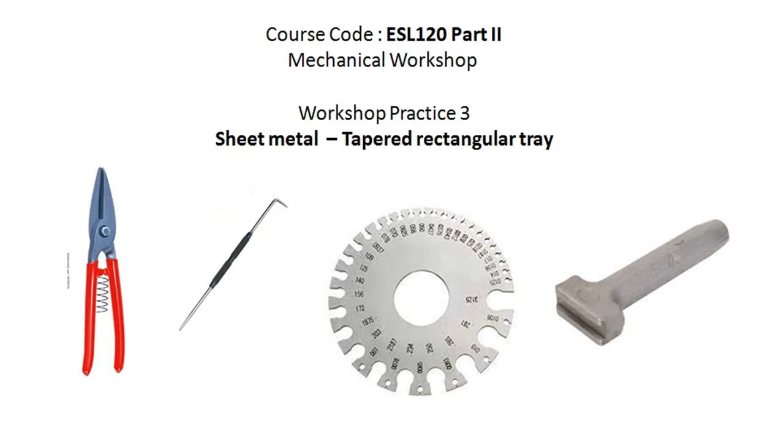Today we will make some item in sheet metal shop. See what is sheet metal shop? Where the items are made from sheet. Now you should know what is meant by sheet. Sheet is any item in the form of laminar form having thickness not more than 4 mm.

Sheet can be made from MS, copper, brass, aluminum. Almost all metal can be converted into sheet. But a few metals cannot be converted into sheet. For example, bell metal, we cannot make into a sheet because it will be brittle.

Usually in our shop we will be using a 24 SWG sheet metal. 24 SWG is almost 0.5 mm thick. We are using a galvanized iron sheet. Galvanizing is given to iron sheet to reduce the corrosion effect. Usually galvanizing is done by dipping the item in molten zinc.

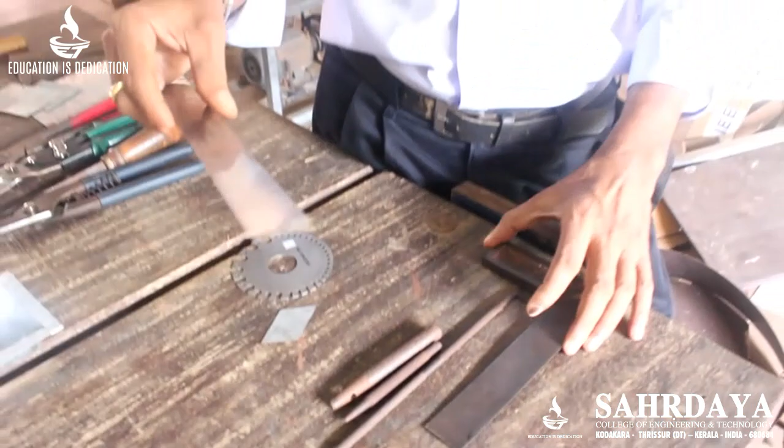Today we will discuss about the tools used in a sheet metal shop. The first item, as you have already studied in another class, is a steel rule for measuring the size of an item to be made or converted, whatever may be. This, as already told, is marked in millimeters as well as inches.

After getting the item, sometimes we may have to reduce the size of the sheet metal or cut the item. Before cutting we have to mark the item with a tool called a scriber. This is a scriber, a pointed tool, so that we will get the marking properly on the sheet metal.

The method is: you keep the sheet metal in a plane surface, then place a straight edge, then mark the line. See, you can see a marked line here. Can you see the line I just drew here? I think it is visible.

In order to select the sheet, usually an equipment is used. The name of the equipment is standard wire gauge. You can see a disc type item having many slots in the outer periphery. It is written as 1, very large gap is there, 2, 3, like that it is going, and the size of the gap keeps reducing. You can see what is written here, standard SWG. SWG means standard wire gauge.

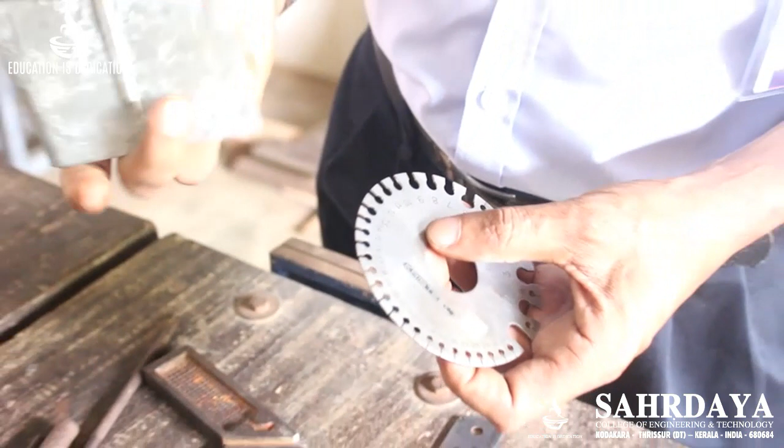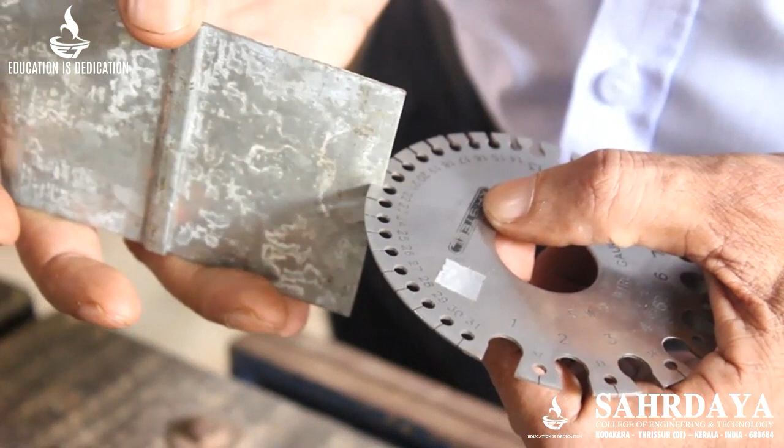How to measure, I will show you. You just insert the item to be measured in the slot. You can see it is 22, it is going freely. But in 23 it is a little tight, but it is going. So this is a 23 gauge galvanized iron sheet. Galvanizing is done to reduce the corrosion effect. Usually corrosion will be less for galvanized iron sheet.

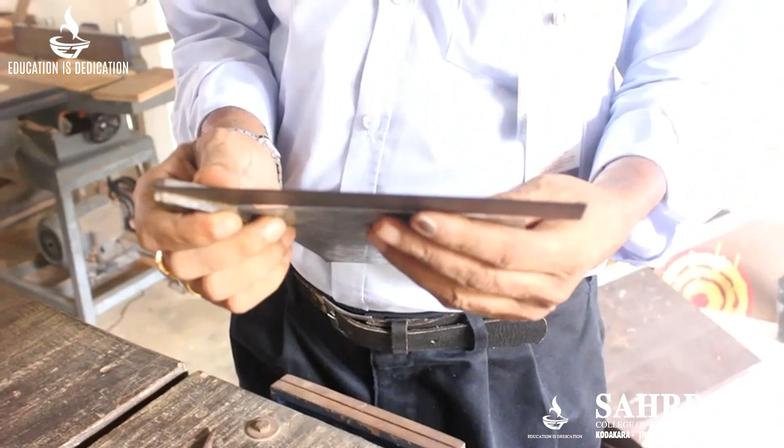You can also use a tri-square for measuring the 90 degree of any item. Suppose I want to check the 90 degree of this sheet, this corner, then I have to keep the item like this. You can see a large gap here, that means it is not 90 degree. If it is not 90 degree, and there is a very large difference, then you have to cut the item. If only a small difference is there, you draw a line with a tri-square like this.

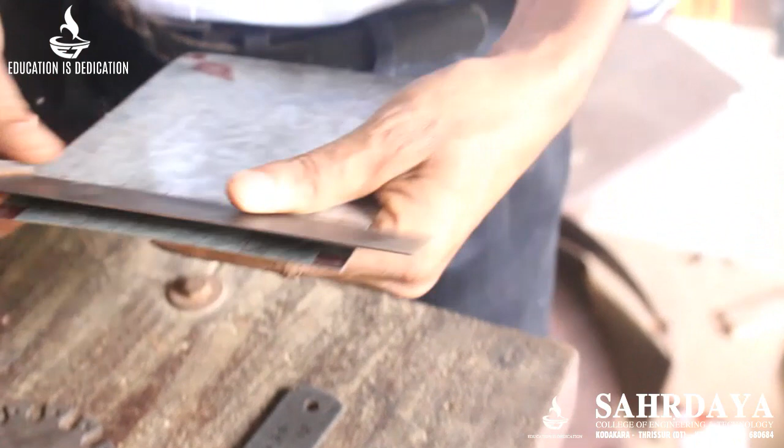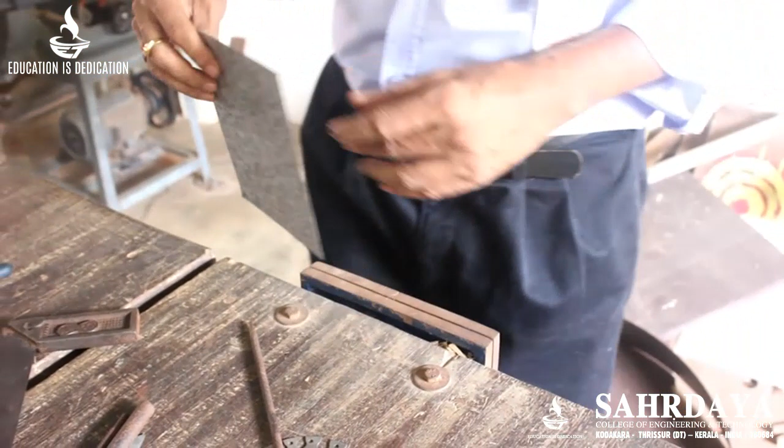Then remove it. It is difficult to cut a very small item of the order of about half mm. What you have to do is hold the item in a bench vise, then file it and reduce the size, so that this angle becomes exactly 90 degree. That is the usual procedure. For that, we usually use a tri-square as well as a small file, usually triangular or small flat file.

Sometimes we may have to join two sheets together. Suppose I want a large item, but only a small item is available. One more item can be joined here, so that you will get a large piece. In order to make that, usually there are 3 or 4 methods. One of the methods I will show you quickly, then I will continue with the next type of joint.

Suppose you want to join two pieces like this one. One method is by putting a hole. In order to make a hole, usually a tool called a punch is used. This is called a solid punch. You can see a circular item and a cylindrical item with sharp edges.

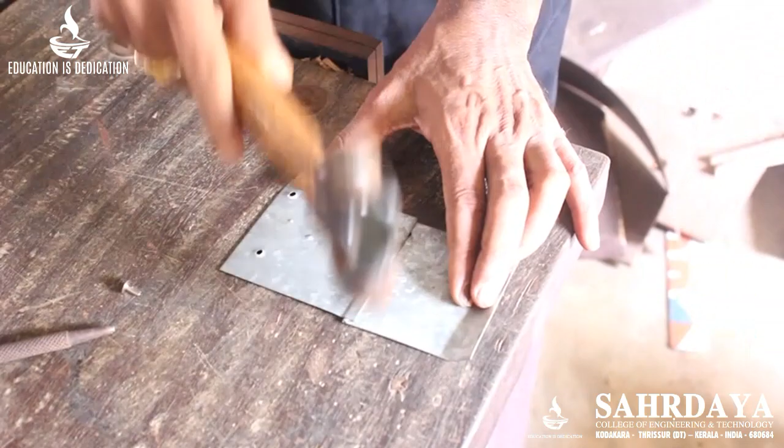Now it has become a single piece. A joint is made, but a small problem is there. If you push together with great force, it will come off. So in order to avoid that slippage, usually another tool is used.

The name of the tool is groover. You can see here there is a groove, and the width of the groove will be keeping on the joint, and we have to strike from the top. Now both sheets will be in the same line, so that even if we are pushing, it will not come off. This type of joint is called a seam joint.

Usually this type of joint is used for air ducts, etc., to carry the cold air. Usually in cinema theatres, etc., you can see this type of joint in the air duct.

See, I am drawing a line here. This is a galvanized sheet metal. Can you see the line properly? I think it may not be properly visible. In order to increase the visibility of the line, usually one punch mark will be done. For that, a punch like this one is used.

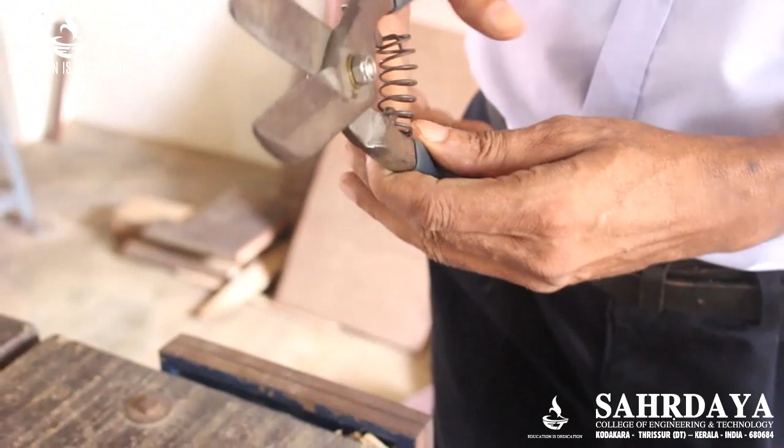In order to cut thin sheet metal, you can use an equipment called snips. Snips is something like scissors. It has two blades, a fulcrum, and a handle. Sometimes a spring is also provided for returning the blades to the original position. I will show you how to cut the item.

On the line, you keep the blade like this, then press with your hand. So you can see cutting is done. Like this you can cut. Usually you have to draw the line where you have to cut the item.

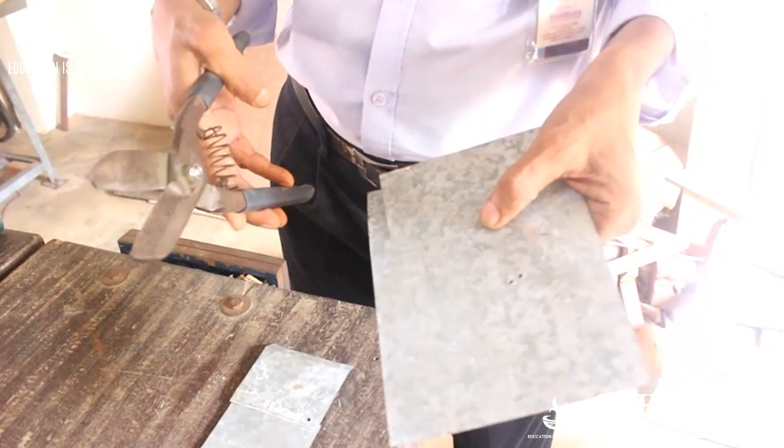This snips is meant for a right-handed person. I will tell you the difference between a right-handed person's snips and a left-handed person's snips. For a right-handed person's snips, the item coming from the bottom comes at the top on the right side. You can see this is at the right side. The blade of this handle is coming at the right side when I am looking from this side. This is meant for a right-handed person.

Usually color coding is also done for the snips. You can see this is a navy blue item, and sometimes it may be colored yellow or red. All these are meant for right-handed persons.

Usually for a left-handed person, the orientation of the blade will be different. You can see this one, the handle item coming from the bottom is at the left side, blade is at the left side. This is meant for left-handed persons. This type of double lever type snips is also available for right-handed persons, but the orientation of the blade will be different. Okay, this is the difference between left-hand snips and right-hand snips.

Sometimes we may have to cut some curvature. For that, usually a curved snips is used. You can see this one, curved snips, so that you can cut along. First, draw the curvature with some pen or CD marking pen or something like that. Then cut along that line, so that you will get a curvature.

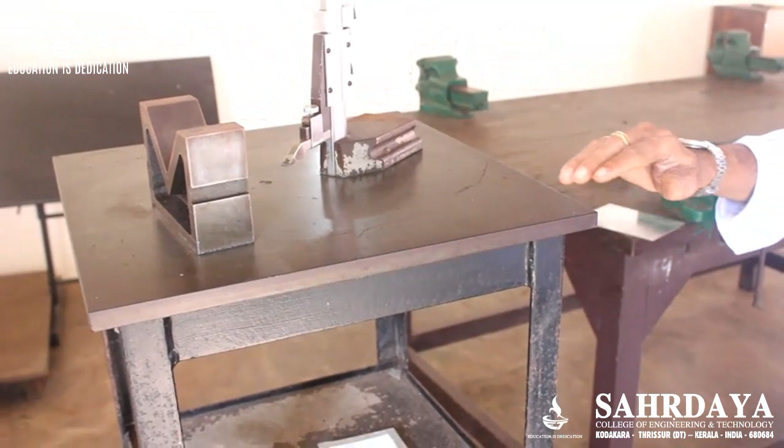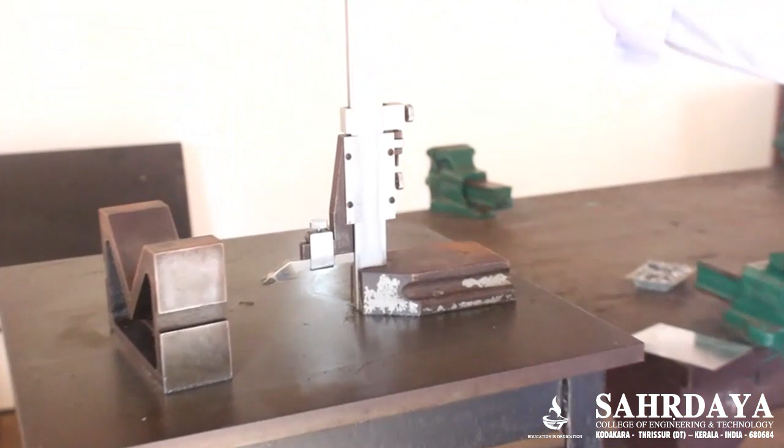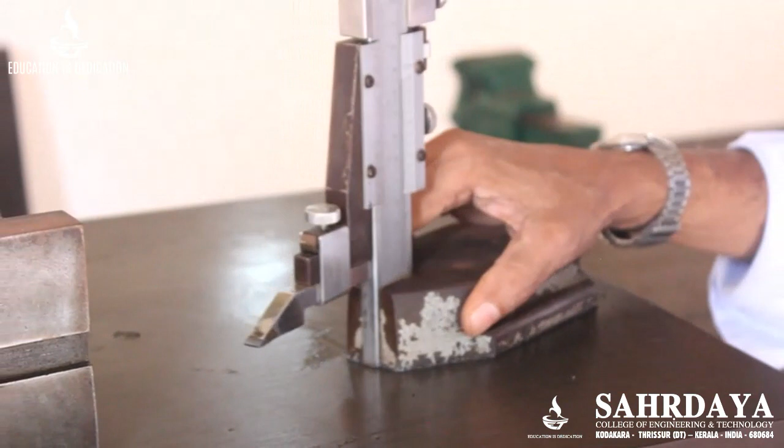This is the surface plate. A surface plate is a plate with a perfectly machined top surface. Over the top surface, usually an item called a vernier height gauge is kept. You can see here, this is the main scale, this is the vernier portion, and this is the scribing jaw, called the scribing jaw, so that we can mark a line over the workpiece.

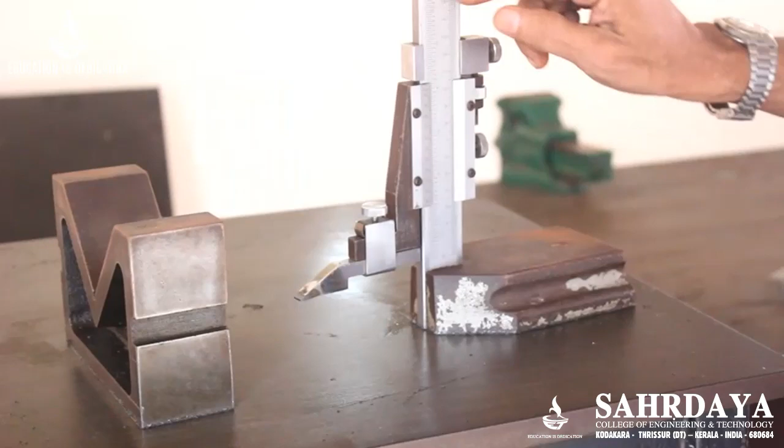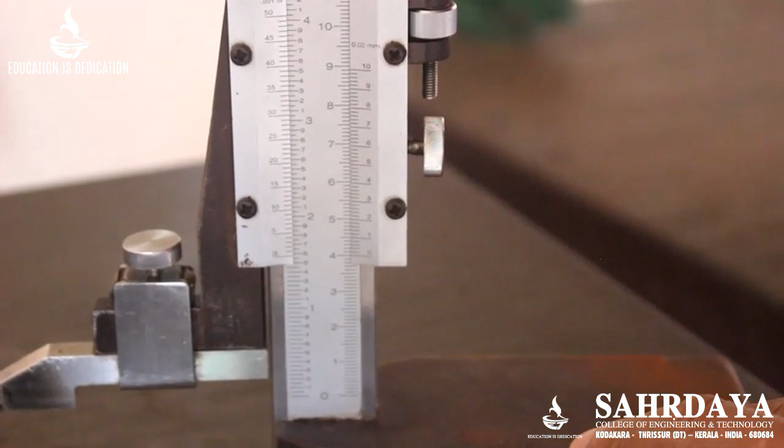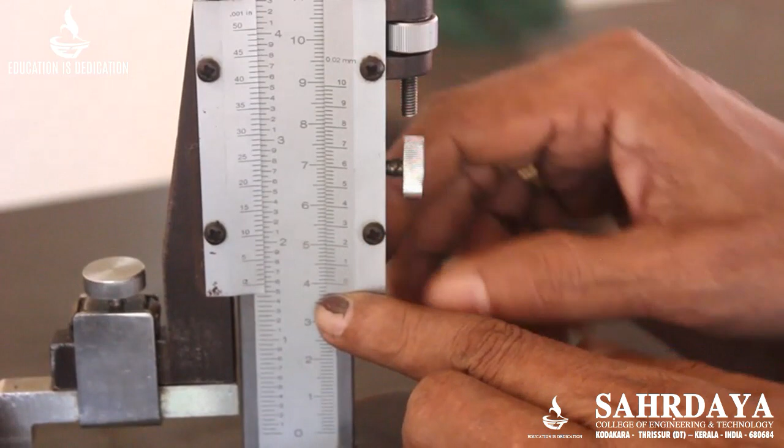Here the main scale is graduated in mm, and the vernier scale is also graduated. I will tell you about the graduations in the vernier as well as the main scale. Here the main scale is marked in millimeters and centimeters are written, 0 starting from here. Similarly, on the vernier portion, graduation is also marked. In the vernier scale, 49 mm is equally divided into 50 parts.

Now, how to find the least count: it is 1 main scale division minus 1 vernier scale division. 1 main scale division is 1 mm, minus 1 vernier scale division, which is 49 by 50 mm. So least count equals 1 minus 49 by 50. That can be taken as 50 by 50 minus 49 by 50, which is equal to 1 by 50. So 1 by 50 is the least count.

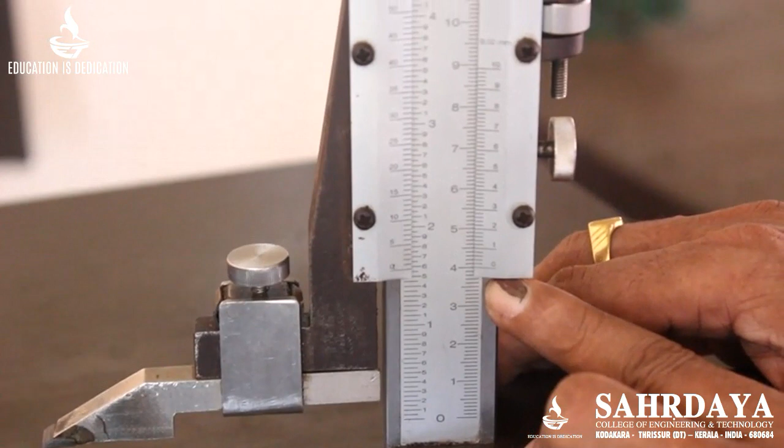1 by 50 can be converted into decimal. You multiply numerator and denominator by 2, then you get 2 by 100. 2 by 100 is equal to 0.02. That is the least count of this equipment.

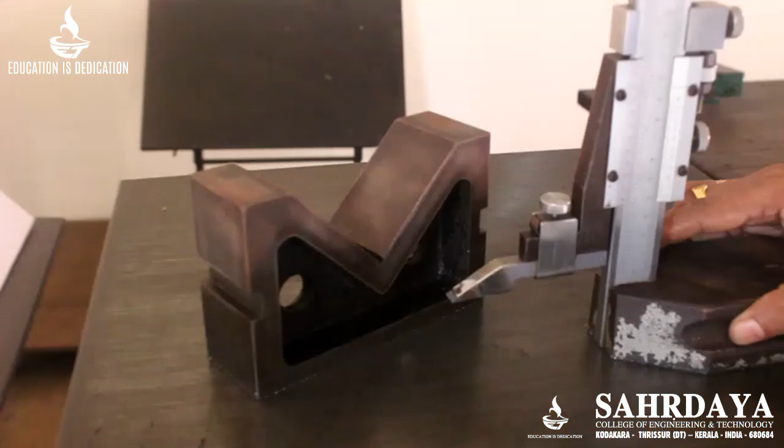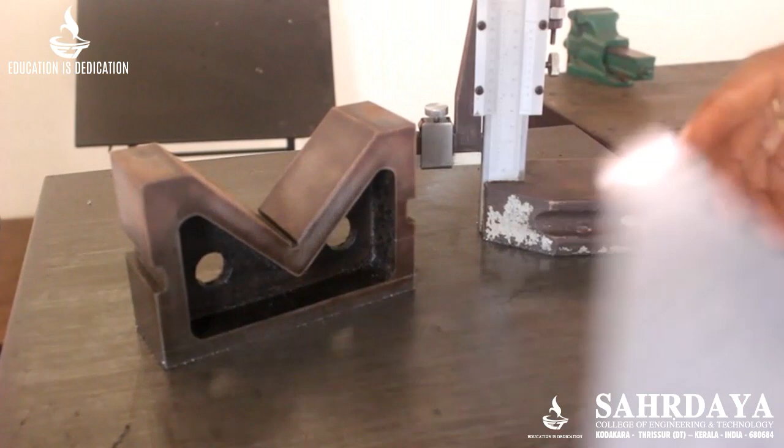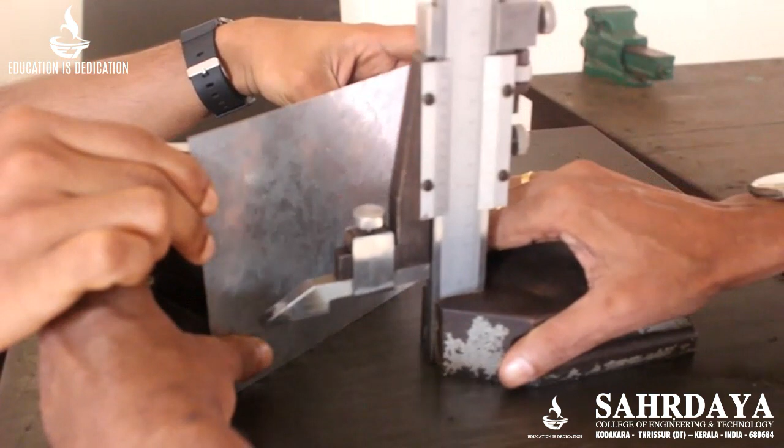Now I will show you how to mark an item, the procedure for changing the dimension, etc. In order to support the workpiece, usually an item called a V block is used. You can see there is something like a V, and usually the workpiece will be leaned against the V block, kept, and then you can adjust the reading of the scriber.

Suppose I want to draw a line at, say, 50 mm. Then what you have to do: the 0 of the vernier portion is kept very near to 50. It may be difficult to position it exactly at 50. Then what you have to do is tighten the thumb screw of the auxiliary head. This portion is called the auxiliary head and this portion is called the main head. Then you tighten the auxiliary head, then adjust the main head with the thumb screw provided here. You can see this is moving, the vernier portion is moving, isn't it?

Suppose I want to correct at 49. Now it is 49 instead of 50. If you want to make 50, you just rotate it and it will come to 50. Now it is 50. Like that, minor adjustment can be done with the thumb screw.

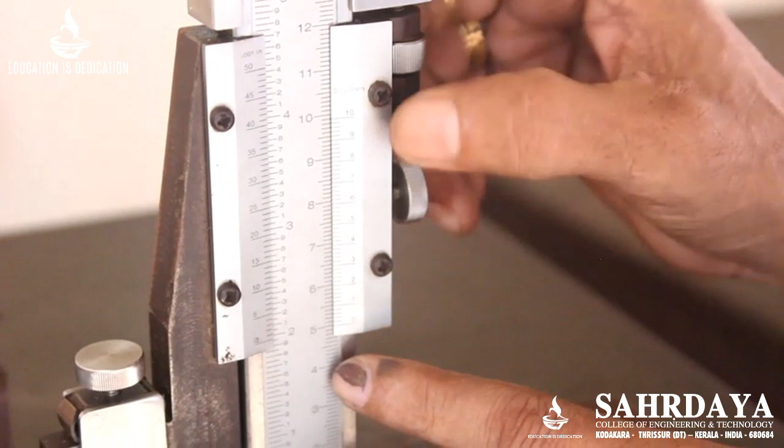After that you should tighten the item so that this will not move. Then you can keep the item here and draw the line. Now it is at 50 mm. The line is at 50 mm.

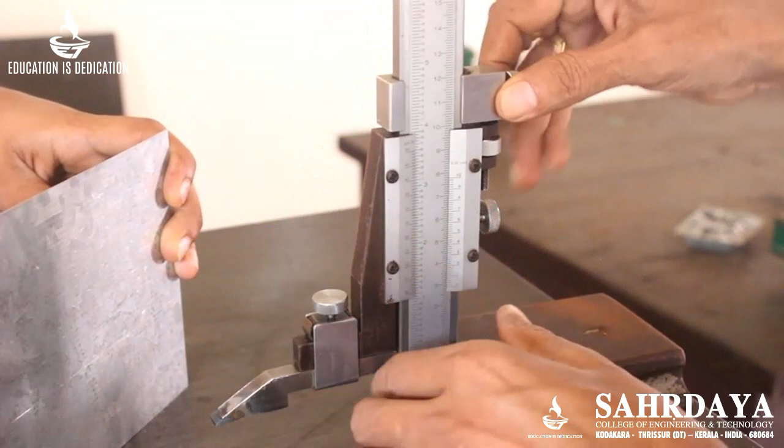Suppose I want to draw another line at 20 mm. What do you have to do? Hold the main head here with your left hand and loosen the thumb screw of the main head, also the auxiliary head. Then move the item and keep the zero of the vernier portion very near to the required dimension. Then tighten the item. Then you can again adjust the item with the thumb screw, then tighten this one. This is the procedure for adjusting the scriber height, so again you can draw the line.

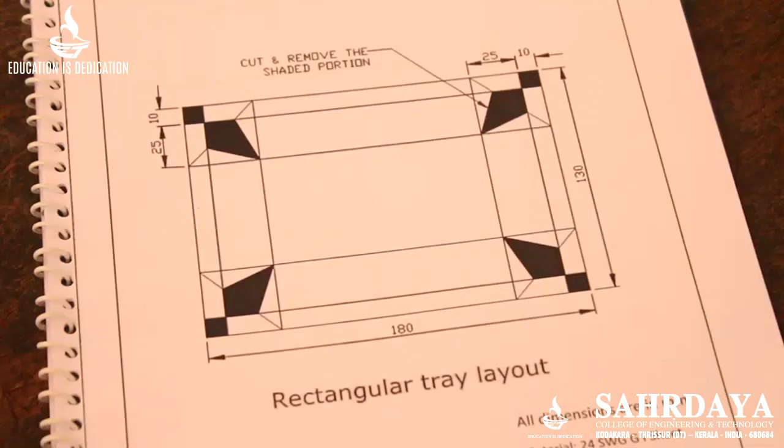This is the usual procedure for drawing the line. Today our aim is to make a prismatic shape like this one. This is called a tapered rectangular tray. In order to make this one, first we have to draw the lines where we have to remove certain portions so that we can fold it into this shape.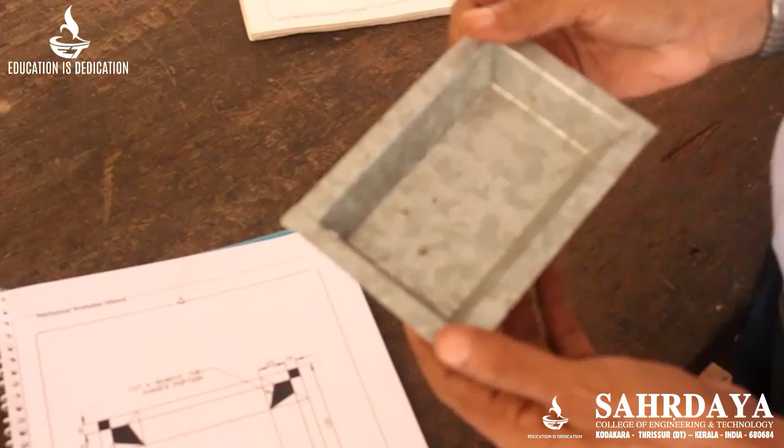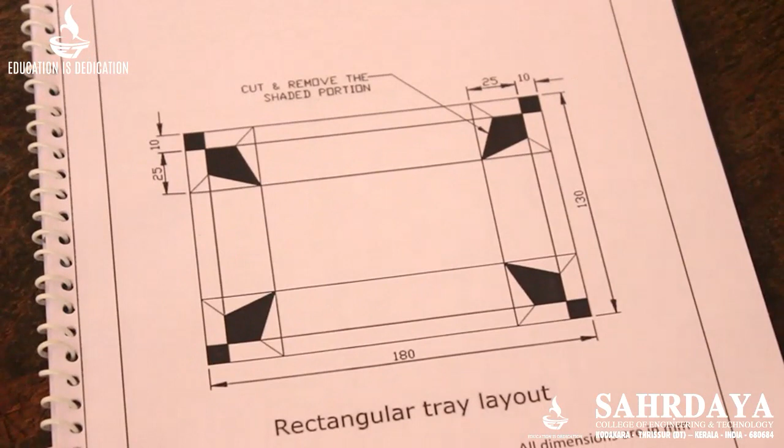You can see this figure. This is the layout of the tapered rectangular tray. Layout means if you unfold this one and look at the item, you will have an item like this one. The size of the sheet metal we have to use is 180 into 130 mm.

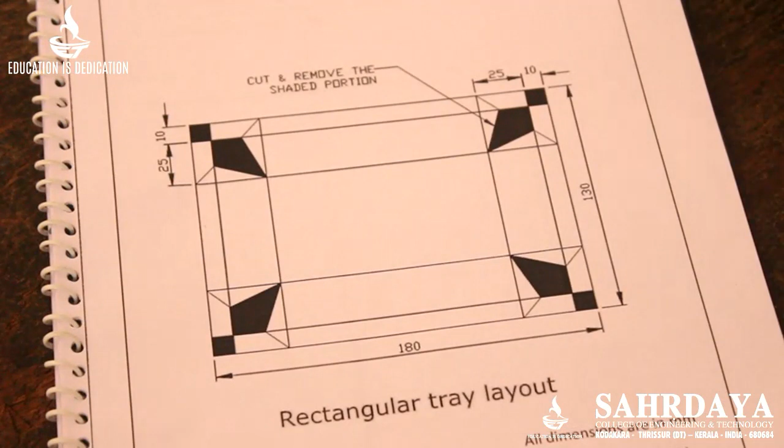I have already told you the corners has to be corrected first using a tri-square and a file. After that you have to draw lines as given in the figure.

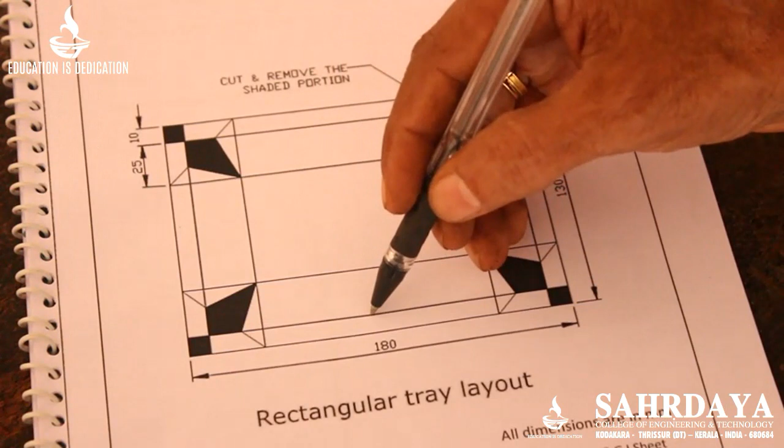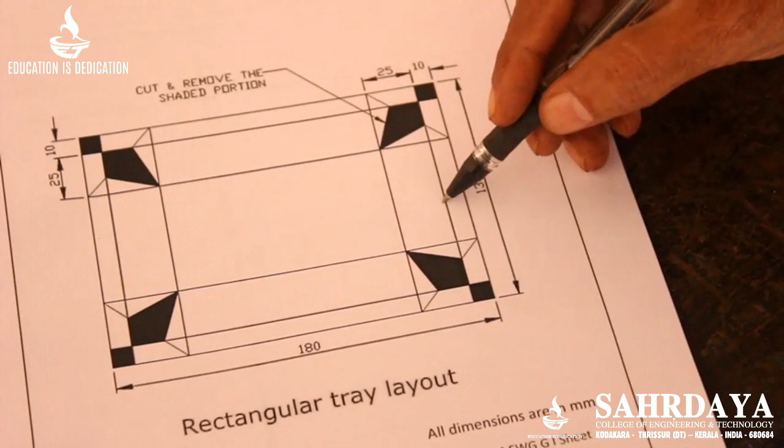From looking into the figure you can see the first line is 10 mm from the bottom. Suppose this is the bottom edge, then you have to draw a line at 10 mm. Not only one side, all the sides have a 10 mm line. This is 10 mm from this edge, 10 mm from this edge, and 10 mm from this edge. So you can keep the 10 mm in the vernier height gauge and draw all the lines.

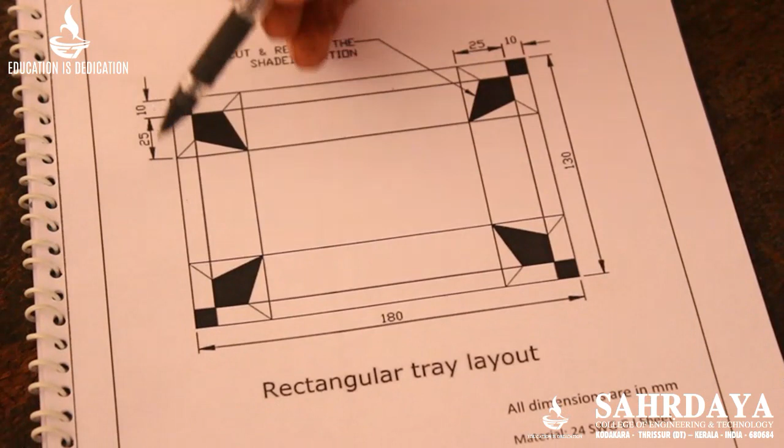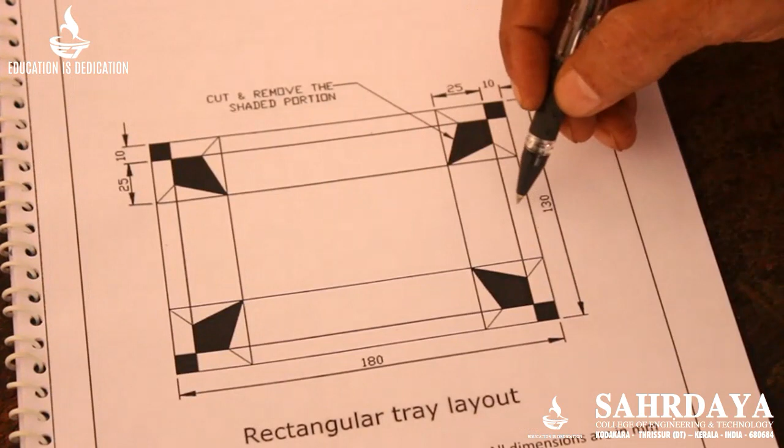On the given workpiece, after that you have to draw another line at 25 mm from the first drawn line, or 35 from the edge. You can see here 25 plus 10, that means 35 from this edge. This line can be drawn. Similarly 35 mm from this edge you can draw this line, also this line as well as this line. So you will be drawing 1, 2, 3, 4, 5, 6, 7, 8 lines altogether.

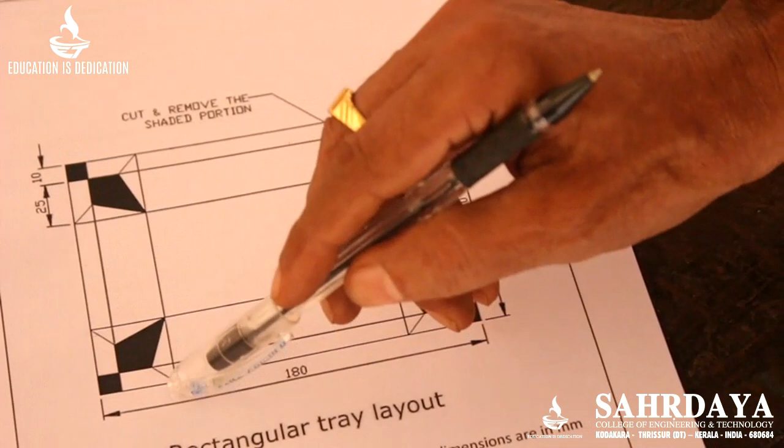After that what you have to do is find the starting point of the 35 mm line. This is one of the starting points, isn't it? Starting point of the 35 mm line. Similarly, starting point of the 35 mm line from this direction. Then join these two with a scriber, using a scriber and a steel rule.

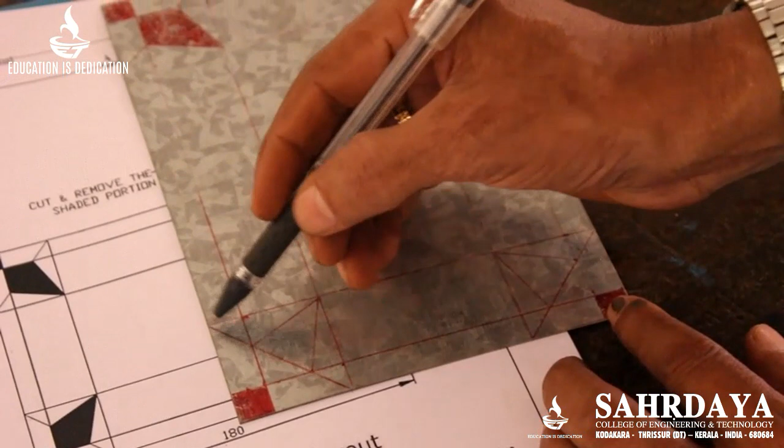This is the starting point of the horizontal line and this is the starting point of the vertical line, at 35 mm distance from the edges. 35 mm from the edges, 35 here, 35 here. This is the starting point. Join that to the starting point with a steel rule and a scriber. You can draw like this.

Then that line will be cutting the 10 mm line here as well as here. Then put a punch mark. Punch means a prick punch mark. You can put a prick punch mark at the cutting point. Similarly, at the other cutting point also. Now, at the meeting point of the 35 mm line here, you can put another punch mark. So altogether 1, 2, 3 punch marks are done.

Then what you have to do is, you start cutting from the 35 mm line on the 10 mm line up to the punch mark. You start from here and end here. Similarly, start from here and end here. Yes.

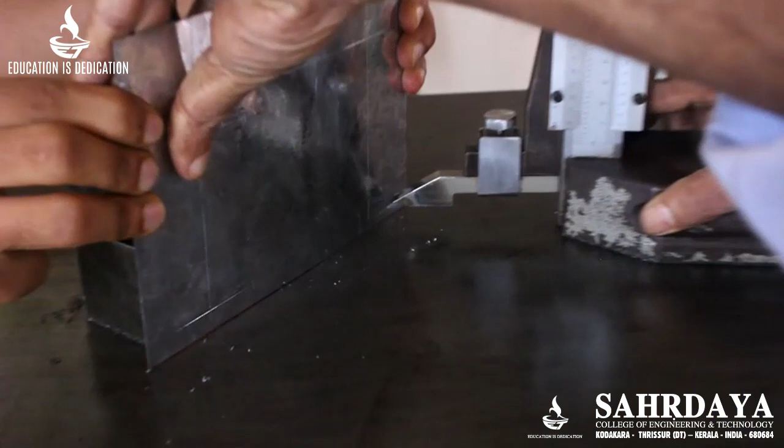See, I have already taken 10 mm on the vernier height gauge. That means the 10 mm is from the surface plate to the scriber point is 10 mm. Now I am drawing the line on the workpiece, 10 mm line. Not only one side, all the sides I am drawing.

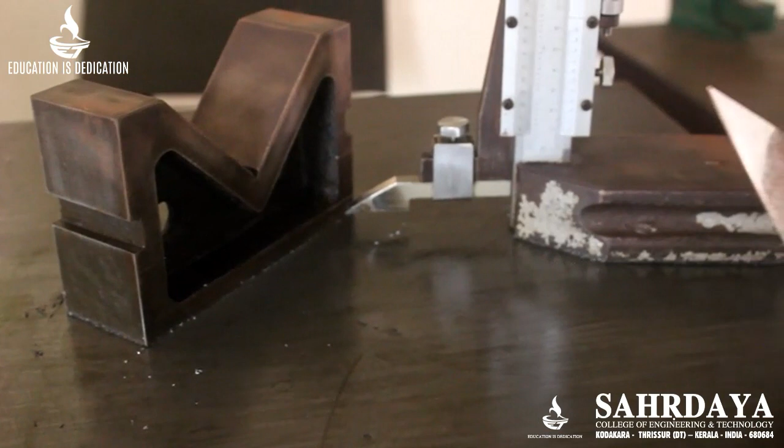All the sides I have already drawn 10 mm line. Now we have to draw 25 mm from the first line, or 35 mm from the edge of the workpiece. So I am taking 35 mm on the vernier height gauge. Exactly I adjust it to 35.

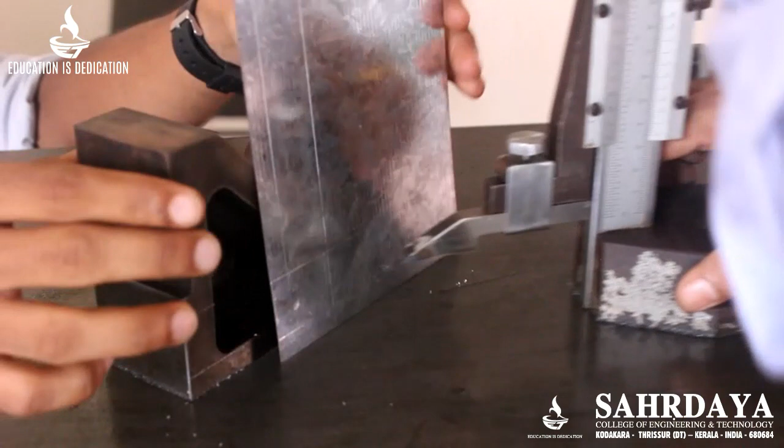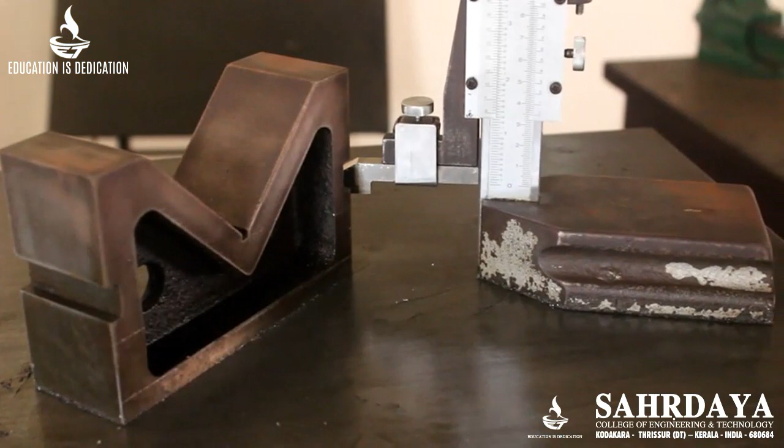Now this is 35 mm. Now draw all the sides with 35 mm. So altogether 8 lines were drawn.

See, after cutting, this portion will be removed. It will be falling down. I told you when you start on the 10 mm up to the prick punch mark here.

Similarly, from here to prick punch mark here. Then fold this portion in the upward direction and start cutting from here to the other prick punch mark. Similarly, from this point to the prick punch mark here. Then this red, I have shown here as red mark, that will be falling down.

Say I am going to cut the item as given in the figure. See, cut only up to the prick punch mark. Now you can cut from this side also up to prick punch mark.

Now what you have to do, you fold this one into downward direction. Then insert the snips here and cut along the line up to the next prick punch mark.

This side also you have to cut. For that you have to fold this tab into upward direction. Then insert the snips here, then cut the item.

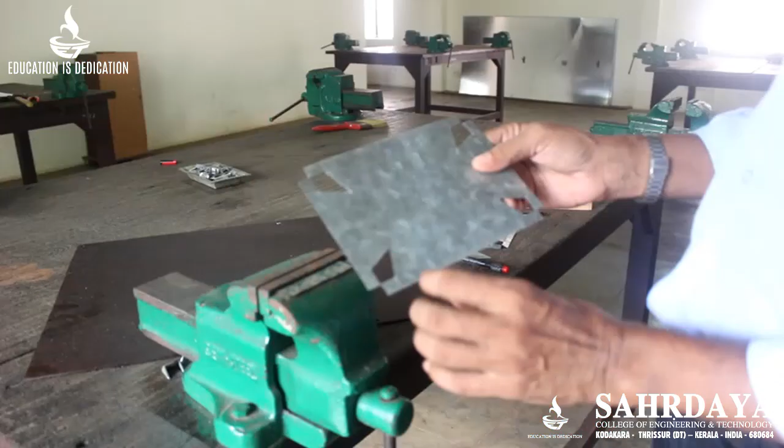Similarly, you cut all the corners like this one. We have completed the cutting of the corners as per the given drawing. Now we have to fold all the 10 mm side in one direction.

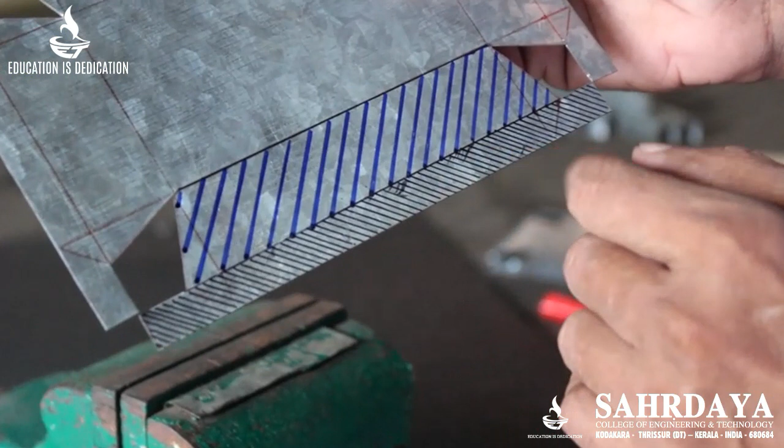In order to see the item properly, I have marked like this. You need not mark like this while doing the work. This is only to indicate where we have to fold.

Now hold the item in the bench vise on the 10 mm line, exactly on the 10 mm line. Any error is there, you can adjust like this. First tighten with less force, then adjust like this.

See that the width of the jaw is less than the width of the line we have to fold. So you give equal distance on both sides. Then tighten the vice properly.

After that you keep your 3 fingers like this and put inside the bench vise. Then with your thumb you fold away from you, for an angle of about 114 degrees, like this.

You can measure it. This is the measuring item, angle gauge. It is called angle gauge, made for the particular work. You can check like this. Now it is almost okay.

Now you take out and once more you do the item in the same line, so that the other end is here. Similarly, other side also.

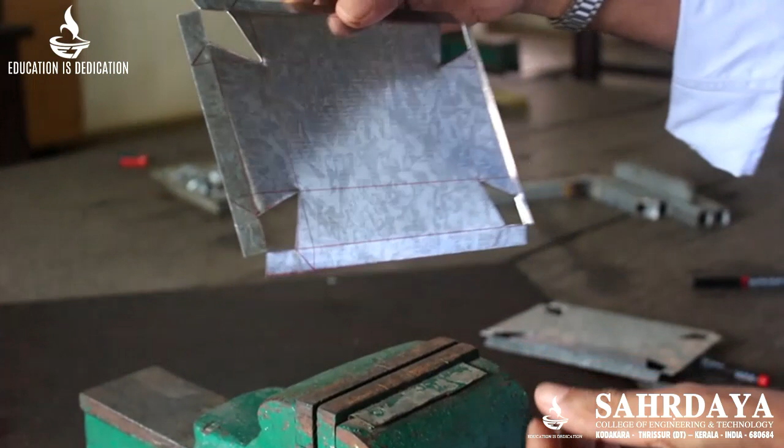While folding on the 35 mm line, it is mentioned that you have to fold only in longer sides. So you fold the item.

In the 10 mm line, we have been folding the item away from you, like this. Now you have to fold towards you.

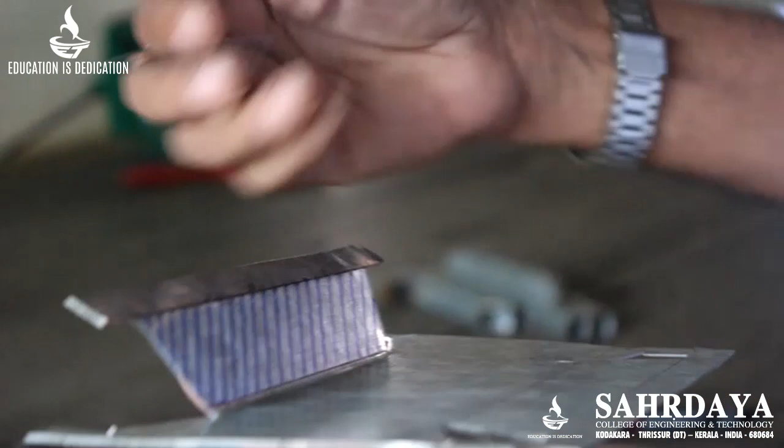At an angle of 114 degrees. In order to check the 114 degree, you take out the item, then with the gauge, you can check like this. If there is no gap here, then it is 114. If any gap is there, you can again fold or unfold the item according to the requirement.

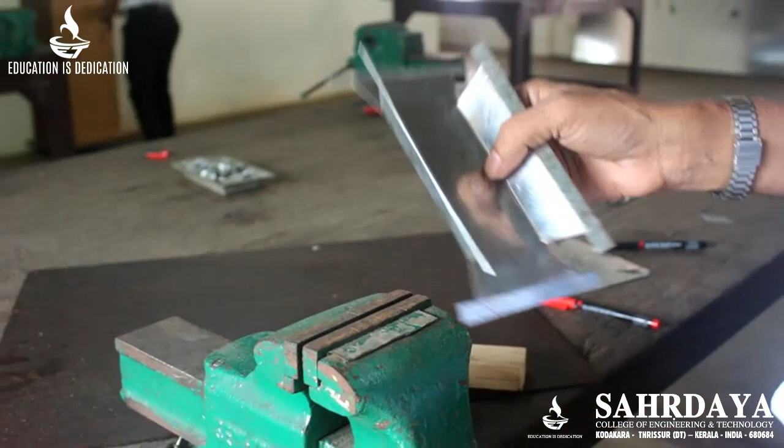Now two sides of the longer sides are already folded. Now you have to fold the shorter side. In order to fold the shorter side, you can see it cannot be held in the bench vise because this one is less than the width of the bench vise. Then what you have to do? You have to use a stake. You can use a square stake.

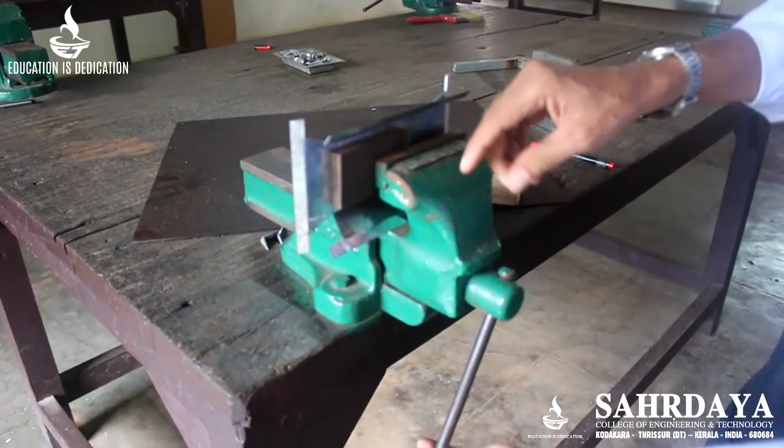Just a piece of flat item like this one. You hold the item on the line like this. Then hold it in the bench vise. Check properly whether the item is exactly on the line. Adjust it properly, then tighten the item.

Now, if you are pulling this side, this tab will be interfering with the other tab like here. So what you have to do? You unfold the item downwards. Then you pull the item towards you. You will get an item like this. Similarly, you hold the other side also. You can use a mallet to do the folding properly.

Now similarly fold the other side also. Fold this one to avoid the interference. And pull the item, and with a mallet you can do a small strike. Then take out the item.

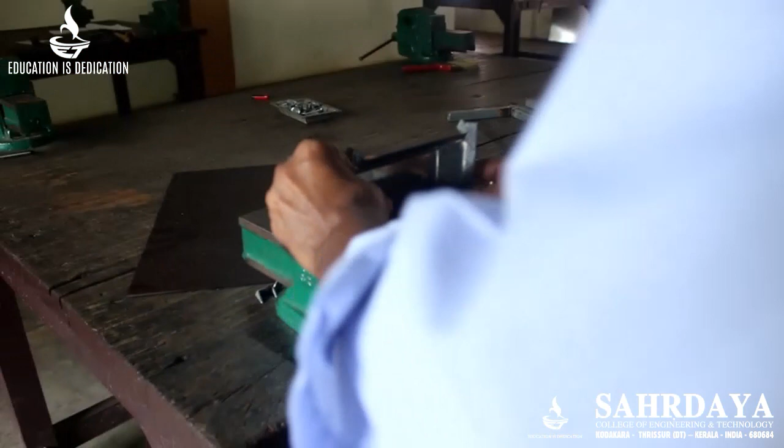Now shape is almost over. Now we have to make these sides parallel to the base. For that, you hold the item again in the 10 mm line. In order to make the item parallel, you have to press here or hold through this line. When this line is vertical, that means this surface is vertical, then it is parallel to the base. You can see here, now this is parallel to this base. You do all the sides like this.

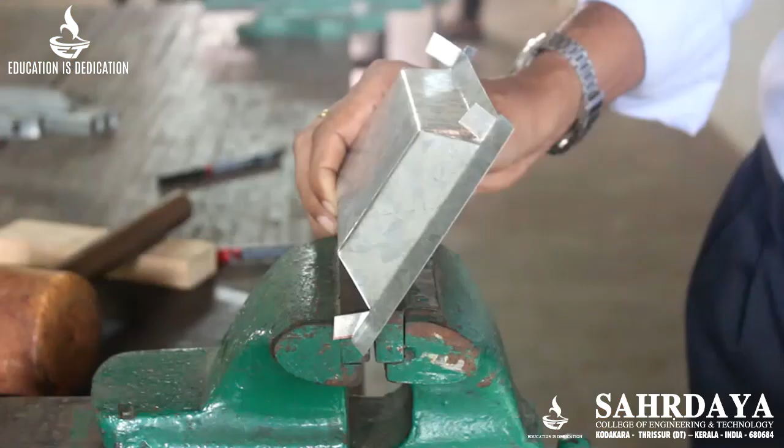Now hold the item in the 10 mm line like this one. Then fold through the 10 mm line so that this surface is vertical. That means then only you will get these sides parallel to the base. See, now you can see all these are parallel.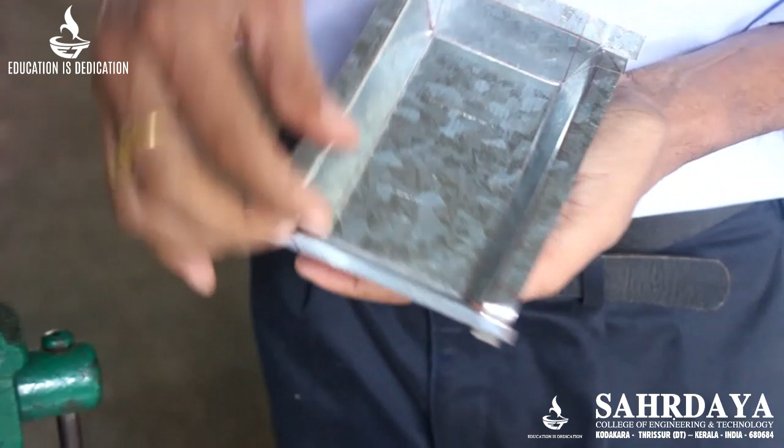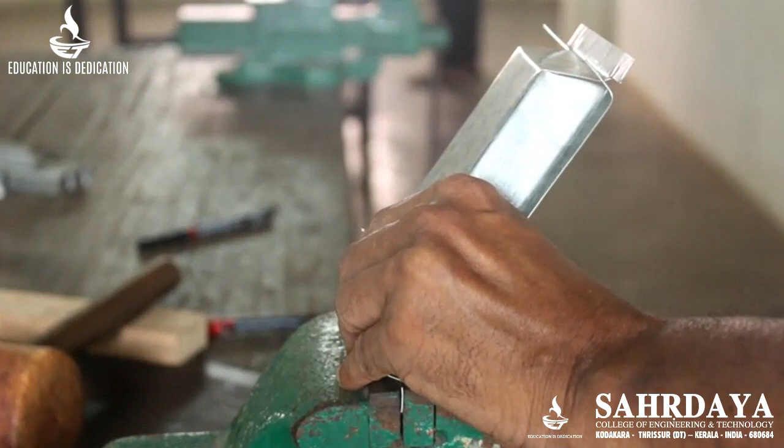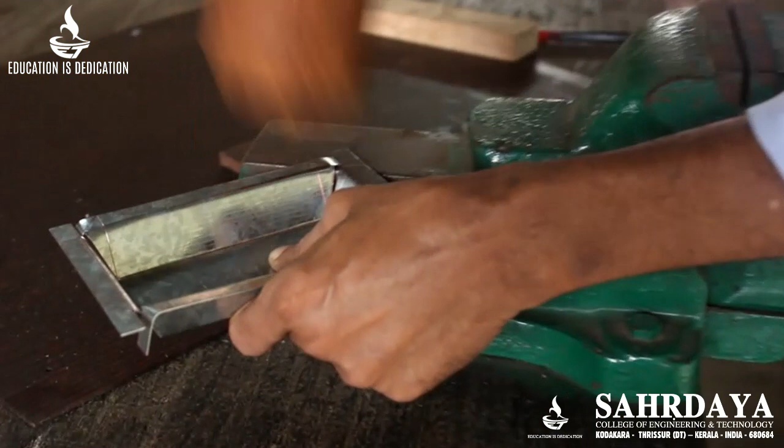Now two sides are pending. That also you can fold like this. Now it is vertical. Similarly, the other side also you can make it vertical. Now the size has almost become a tray shape.

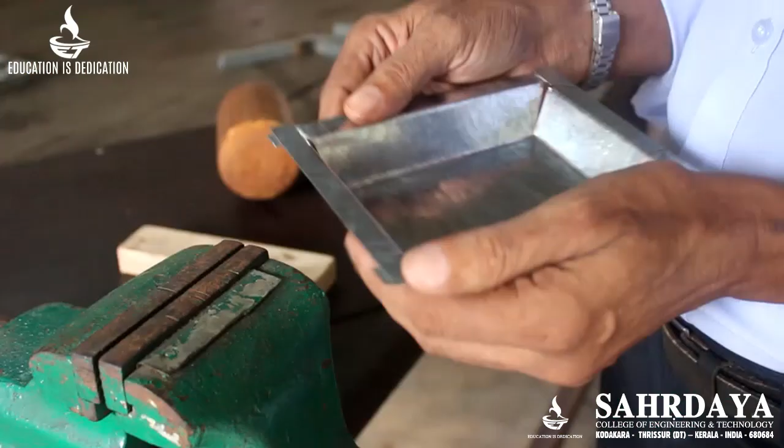Now we have to lock all four corners. For that, first you look into the tray. Here this tab is coming at the top of this one. You see this one is coming at the top of this one. Then you hold that portion, the item coming at the top, in the bench vise. Like this, you can hold.

Now press together so that there is no gap here. You can see there is no gap here. Then what you have to do: using a combination plier, you hold the projecting item, then fold it downwards. When looking from the cavity of the tray, it should be in the downward direction. Using a ball peen hammer, you hold like. Before folding, it is better to hold with a combination plier like this.

After that you take out the item and give a small strike. Do not give too much force, only give less force so that it can be moved again. Then you hold in the other piece. Now we have been holding here. Now you hold on this side. That means like this one.